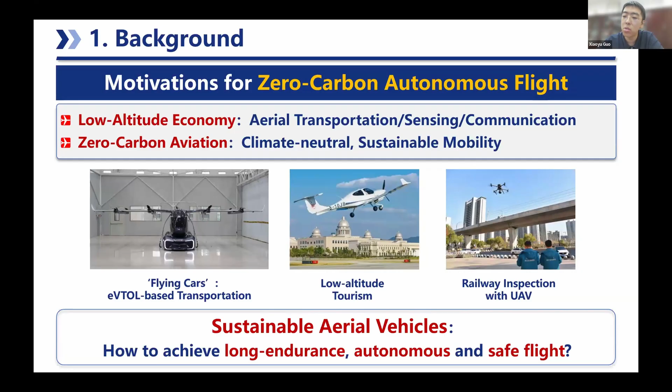While we are moving towards sustainable aerial vehicles, a key challenge is how do we achieve long-endurance, autonomous, and safe flight? If we look through the history of aerial vehicles, we need to focus on the energy system, which is the heart of aerial vehicles. More traditionally, aerial vehicles have relied on internal combustion engines or aircraft engines as its energy source.

More recently, most of the aerial vehicles we see today, such as the DJI drones, the most popular UAV, are mostly powered with lithium-ion batteries, which are the same batteries as we use in our phones, etc. One benefit to that is that it brings sustainable, meaning zero carbon, energy into aerial vehicles.

Also, as most of our sensors and controllers are electrified, it's also convenient as it saves one procedure of energy conversion. However, as we all know, battery-powered aerial vehicles have a key bottleneck in terms of endurance, meaning that most of these battery-powered aerial vehicles have an endurance of below 1 hour. Actually, most of them have an endurance of 20 to 30 minutes.

So as we move the aerial vehicle energy from traditional to sustainable, we reach our solution: hydrogen-powered aircraft, powered by a hybrid between a hydrogen fuel cell and a lithium-ion battery, that can achieve zero carbon emission while achieving much longer endurance, up to 10 hours, and also remain zero carbon and pollution-free.

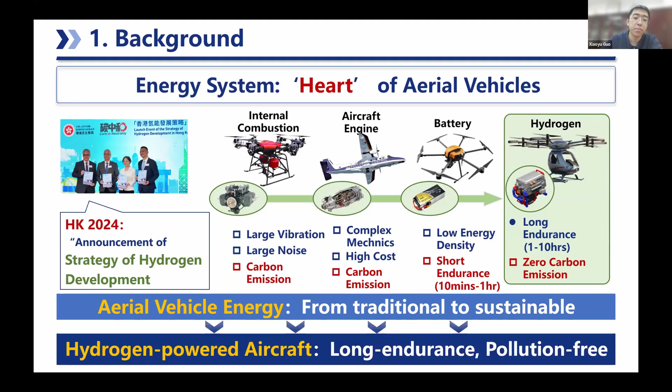A brief history on hydrogen-powered aircraft: a little over 2 decades ago, AeroVironment company from the US developed the first hydrogen UAV, but it was more of an experimental prototype with an endurance of 15 minutes. 10 years later, Liaoning Aviation Institute built China's first hydrogen UAV.

And then 10 years after that, our team in CityU developed the first hydrogen drone that is capable of fully autonomous flight. More recently, companies such as Joby from the US and H2FLY from Germany have developed larger hydrogen-powered aerial vehicles that are capable of manned flight.

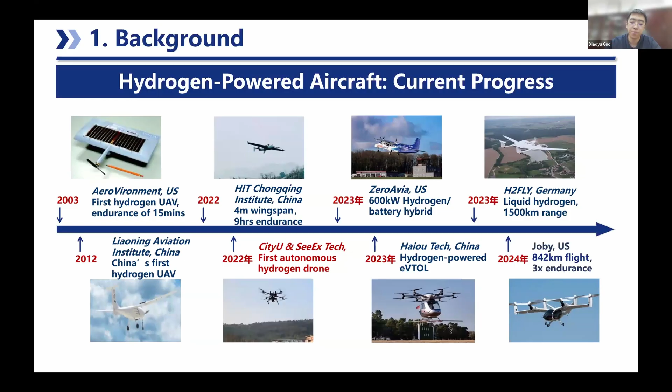To give a brief introduction of the topology of hydrogen aircrafts: firstly, as it is an electrified aircraft, you have your aircraft motor and rotor system. And for the energy, as I mentioned before, you have a hybrid between a hydrogen fuel cell and a lithium-ion battery. The reason we have this hybrid is that, as a lot of our colleagues might know, while hydrogen fuel cells can have quite high energy density, they have a relatively low instantaneous energy response.

In order to fix that issue, we hybridize it with a lithium-ion battery, which has a much higher specific power density that can produce the burst of power we need when we are doing highly dynamic maneuvers, such as

takeoff and landing. Perhaps more unique to hydrogen aircrafts is the flight and energy controller unit. Whereas with traditional UAVs, you have a flight controller, typically a Pixhawk, a PX4, and an autopilot, meaning your inertia measurement units, GPS, etc.

But with the hydrogen aircraft, we also need a specific dedicated controller for the fuel cell, which handles the controlling of all the BOP, or the balance of plant, within the fuel cell, and also handles power allocation between the fuel cell and the lithium-ion battery.

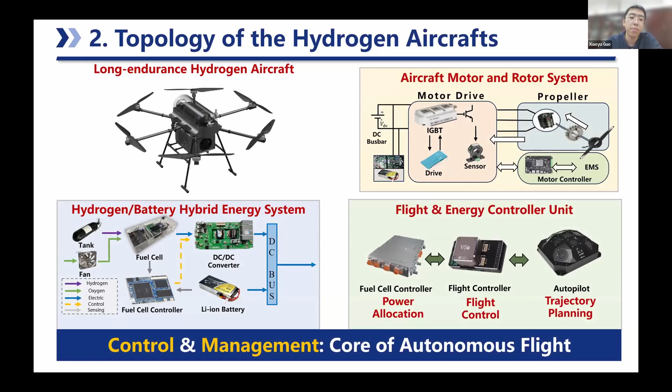Therefore, control and management is one of the unique challenges brought by hydrogen-powered UAVs, and also the core of autonomous flight. Now I shall move on to an introduction of some of our work in academia on the safety control of hydrogen UAVs.

In order for some of the audience to better understand this problem, I would like to draw some parallels between EVs and hydrogen-powered aircrafts. The autonomous driving of EVs have also become somewhat of a hotspot in recent years, and this is also the motivation of why we want to develop autonomous aerial vehicles, because we want to bring procedures such as building inspection and surveillance into automation. Whereas if we see the environments between EVs and our hydrogen UAVs, some of the challenges we face are even more difficult to tackle.

Firstly, EVs are mostly driven in labeled environments, meaning you have fixed lanes, fixed roads, and fixed traffic lights. Aircrafts move in unstructured environments, and it is also three-dimensional rather than two-dimensional. Also, whereas most EVs, such as your Teslas and BYDs, are purely electric and solely battery powered, our aircraft is powered by a hydrogen and electric hybrid, meaning we need to control the hydrogen fuel cell and also handle power allocation between hydrogen and electric battery in real time. Our aircraft is propeller driven, with either 4, 6, or 8 propellers, and whatever the number, we need to handle active power distribution between the propellers as well.

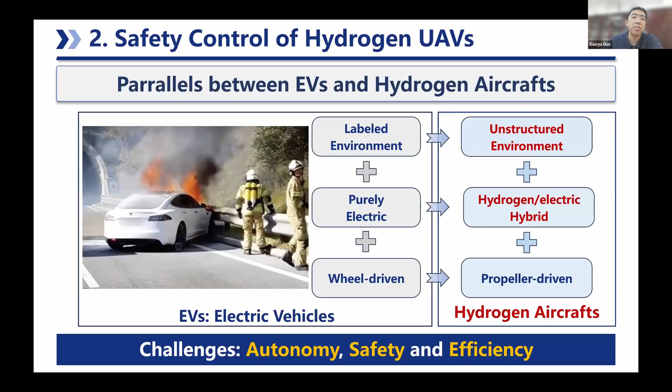So how do we achieve this autonomous control of hydrogen aircrafts? It all comes down to coordination between energy, meaning our hydrogen energy, and motion, meaning the propellers and flight controllers of the UAV. That involves embodied synergy between motion and energy via an integrated controller, and I will give some details on this controller unit later on.

From the algorithm side, it means that we need to integrate all of these flight and energy management algorithms, namely trajectory planning, flight control, fuel cell control, power allocation, energy management, and battery management. We need to integrate those in an organic, safe, and efficient manner.

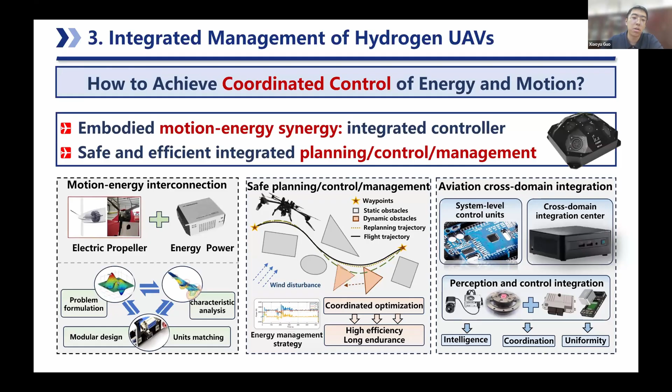In terms of research, of course, it comes down to a lot of interdisciplinary work. But as today is more or less towards a broader general audience, I will not go into too much detail on the specific research, but instead I will show some of our work on this topic. Before that, let me give a little bit of background on autonomous flight.

So two of the most important algorithms for the autonomous flight of hydrogen UAVs: trajectory planning, which refers to trajectory generation according to our mission and constraints, meaning we have time constraints, space constraints, and obstacles. We then generate a trajectory that fulfills all of our constraints.

The other one is power allocation, and this is unique to our hydrogen hybrid UAV only. This means we need to create synergy between the fuel cell, which has higher density and slower response, and the battery, which has lower capacity but a fast response. This is also done in real time via the DC-DC converter.

Both of these algorithms also have shared objectives. We both want to enhance energy efficiency, namely the efficiency of the fuel cell, and also the lifetime of the battery and the fuel cell.

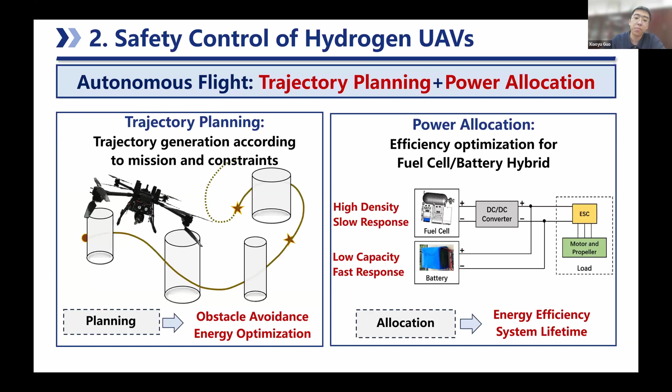With that theme in mind, we have done some work on the coordinated control and management of hydrogen fuel cells, and that allows us to increase the range by over 10% and prolong system lifetime by over 20%, without modifying the hardware of our hydrogen UAVs.

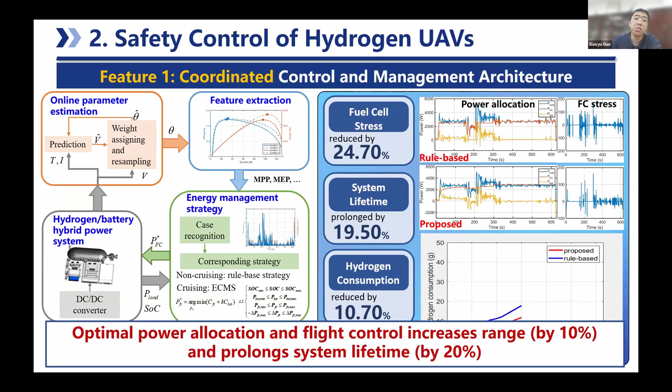Secondly, we have conducted work on autonomous safe planning and control, meaning we have integrated trajectory planning, energy management, and UAV and fuel cell control to enable autonomous planning, control, collision avoidance, landing, and takeoff. All the flight you see on this video is fully automated.

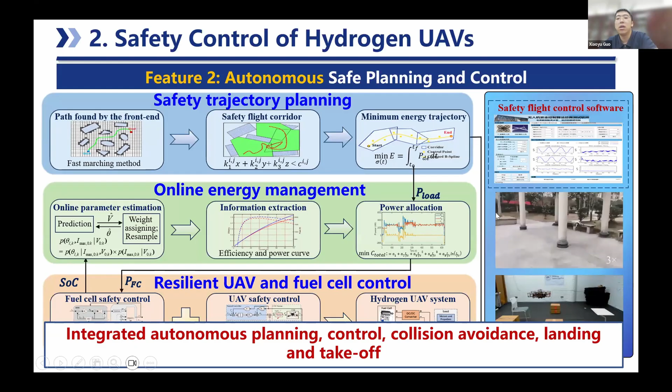Thirdly, in terms of UAVs, we are particularly focused on safety, and that is even more important when we consider the safety of hydrogen fuel cells. That's why we developed safety controllers that can improve flight control accuracy and also allow us to land safely even with a broken propeller or under strong winds.

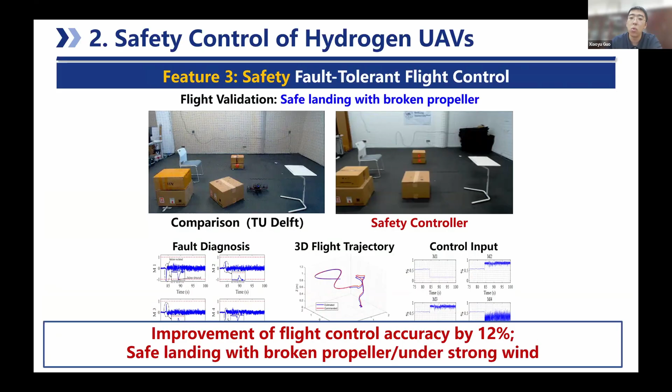As I mentioned before, coordination between the flight and energy domain does not only mean the combination of two algorithms. In terms of hardware controller architecture, we also co-optimized the flight controller and the energy controller with this cross-domain integrated controller on board our UAV. This enables a wide range of autonomous applications such as path planning, monitoring and inspection, as well as fire rescue.

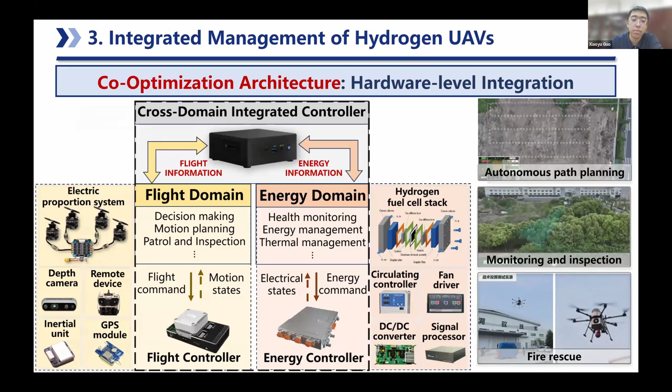And then finally, a little bit of prospects on the research side. Recently, some of you might be familiar with the word embodied energy. This is a word used as a parallel to embodied intelligence, which is also quite popular in the AI realm. That means, if you think about it, like us as humans, or this flying rat we see in this slide, they do not store all their energy within an external battery or fuel cell. Instead, we store energy in the fat in our body and in various organs.

What embodied energy means is that our lab is also trying to move beyond the traditional paradigm of UAVs, meaning that we design our propellers, our flight controllers, etc., and then we slap a fuel cell or a battery on top of it. Instead, we are trying to integrate the power generation, the hydrogen production, and the hydrogen storage within the structures and materials of these UAVs.

For instance, take this flying rat as an example. We can use flexible fuel cells, these new materials, as the wings for this UAV. And we can store hydrogen within solid hydrogen storage, within metal powders that can be stored within the structure of the UAV itself. I believe this will be perhaps a very important future direction of aerial vehicle design, an integration between material, mechanism, and control.

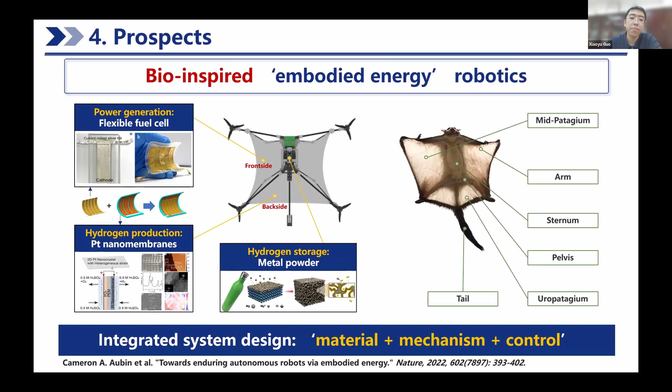I'll not go into too much detail on the research side, but if you're interested, you can refer to some of our select publications. Also this year, we have published one of the first monographs on safe control of hydrogen fuel cells, theory and practice, with Springer, in press. And also this year, back in the mainland, we have formed the first team standard on the general technical requirements for hydrogen energy unmanned vehicles, where we have outlined some of the safety standards for hydrogen UAVs.

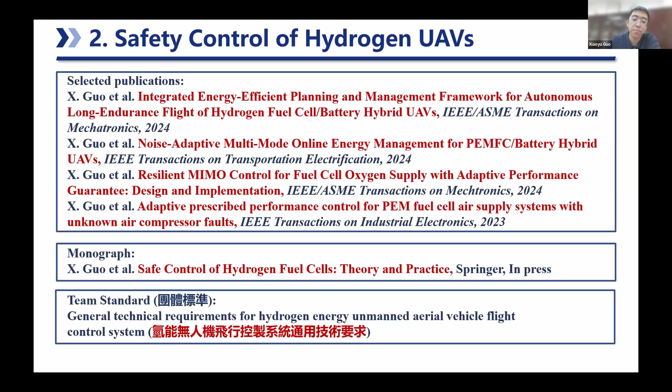Now moving on to something that might be more interesting for the general audience and some of you working in industry, and that is the applications and some of the prospects, some of the impact cases of our self-developed hydrogen UAV.

First, to answer the very important question, how large is our hydrogen UAV? Well, the answer is it depends. The smallest ones we have developed are 25 kilograms in weight, and it utilizes a 3 kilowatt fuel cell pack and also has a maximum payload of 6 kilograms, and can achieve an endurance fully loaded of almost 3 hours, which is quite impressive, especially compared to the battery-powered counterparts.

But also utilizing this platform that we call the modular energy platform, we can cover a wide range of weight classes. For instance, by combining 4 3-kilowatt fuel cells to form a multi-fuel cell system, we can develop this 100 kilogram UAV with a maximum payload of 40 kilograms. And by forming a fuel cell matrix, meaning 4 by 4 3-kilowatt fuel cells, we have recently developed this quite large 360 kilogram UAV with a maximum payload of over 100 kilograms.

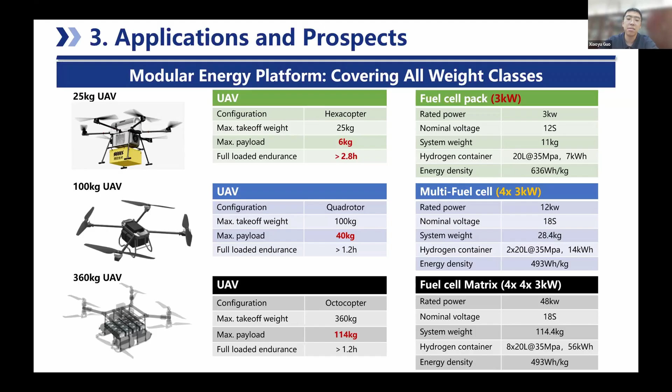Now move on to some of the typical applications. All of the videos we've seen here are real applications and experimentation on our hydrogen UAVs. The 3 key applications can be summarized as: first, logistics, meaning emergency energy delivery and delivery of search and rescue equipment, or on-site sampling. One benefit of hydrogen power to this logistics application is that it has a rather large payload. For instance, the 360 kilogram UAV shown in the last slide has a payload of 100 kilograms, which allows us to carry significantly larger payloads and still fly for over 1 hour.

The second is surveillance, meaning autonomous inspection, such as the building inspection here in Hong Kong, and also urban or traffic surveillance, and surveillance of our ecosystem in Hong Kong, such as our forests and coastlines. This is related to the long endurance of our hydrogen UAV.

Typically, if we want to inspect a building, I have talked to some of the engineers here in Hong Kong. The traditional solution is we have a UAV, but we also have like 5 or 10 batteries ready to go on the ground. So what they do is, for a skyscraper for instance, they surveil the first couple of floors, and then the UAV comes down, we replace the lithium-ion battery, then it goes back up again, and repeats this process 3 or 4 times during inspection.

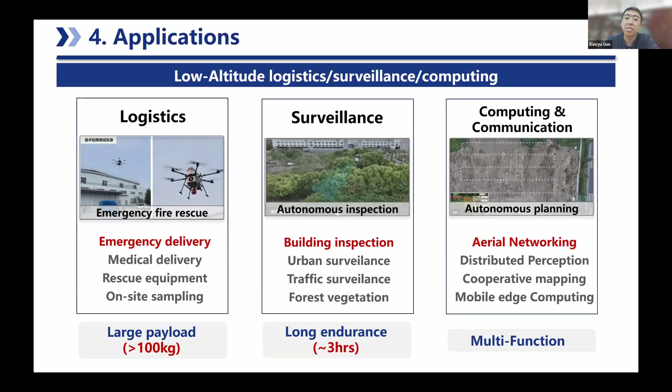Over the years, we have applied our UAV with a lot of industry partners, and also built, as I mentioned before, the team standard for the general technical requirements for hydrogen UAV control systems.

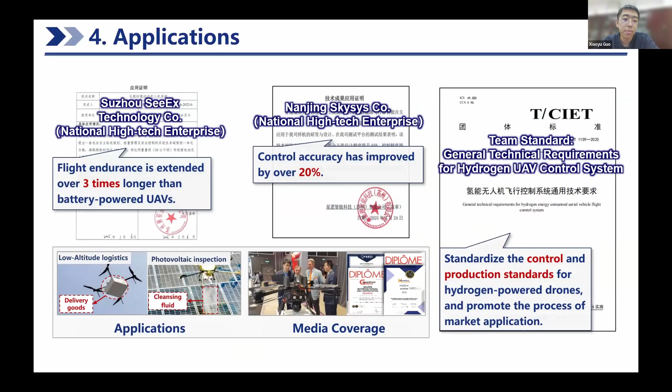Now moving on to some of the more interesting impact cases of our UAV. This is an ongoing project developing our hydrogen UAV for Antarctic exploration and operation. It's a common theme internationally that with Antarctic environments, we try to use more unmanned systems, such as UAVs and robot dogs, for exploration, because it is simply more durable and frankly safer than using humans.

As we all know, batteries don't perform well in low temperature, and that is why hydrogen fuel cells are a great candidate for Antarctic flights. Firstly, fuel cells naturally carry a larger amount of energy. Secondly, as many of you know, hydrogen fuel cells generate a lot of heat while generating power.

In typical urban environments, such as Hong Kong on a hot summer day, this heat is blown out and dissipated by fans. But in Antarctica, this heat can be a valuable resource to warm up and maintain the optimal temperature for our fuel cell. That is what we developed in our Antarctic hydrogen UAV: a heat recycling and reuse mechanism to enable startup and safe flight below minus 25 Celsius degrees.

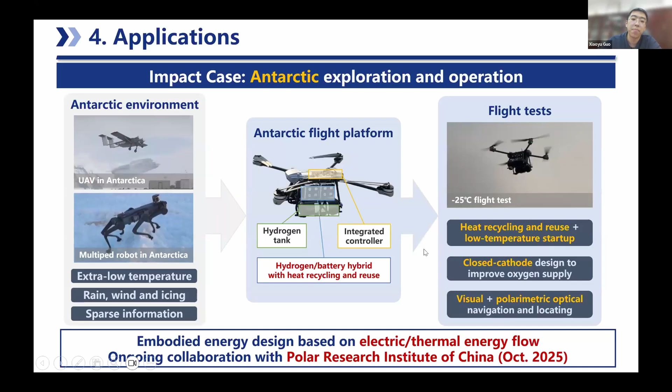Secondly, as I mentioned before, we're trying to break the paradigm of UAVs only as a carrier. We're trying to bring the functions of computation and communication to our hydrogen UAVs. Why is this something that only hydrogen can do? Because edge computing devices and communication modules consume a lot of power. With typical lithium-ion battery UAVs, the UAV itself, even with zero load, can only fly for half an hour at a time.

So carrying all these extra loads, while these loads are also consuming power, typically they cannot fly for more than 5 minutes. But with hydrogen fuel cells, this platform shown here can fly for over half an hour at a time while carrying a computing device and a communication module.

This enables a lot of novel applications, such as local LLM implementation on air, and it can do low altitude networking within an Internet of Things agent on the ground, truly making it a low altitude communication, perception, and computing agent. This is also an ongoing project with the China Mobile Group Design Institute.

To conclude, I believe that hydrogen is a great solution for long endurance and sustainable aviation. In terms of electrified sustainable aviation, it is perhaps the only solution at this point. Our team has developed a series of not only hydrogen UAVs, but what we refer to as intelligent aerial robotics, with applications in polar, aerospace, and edge computing.